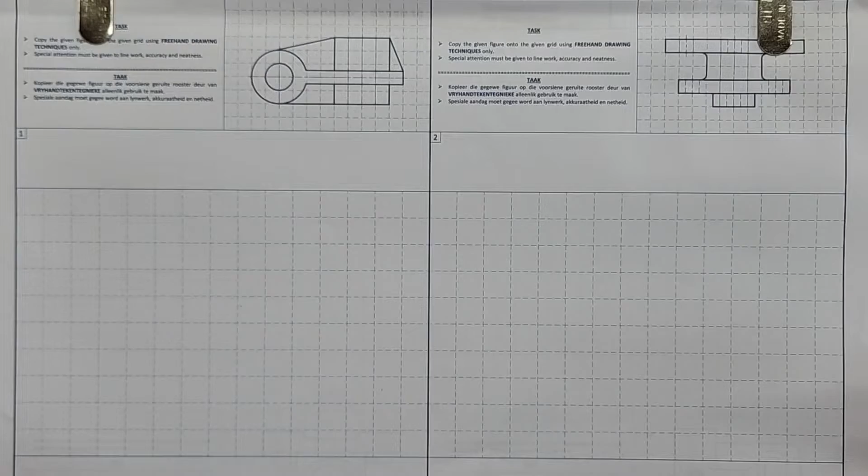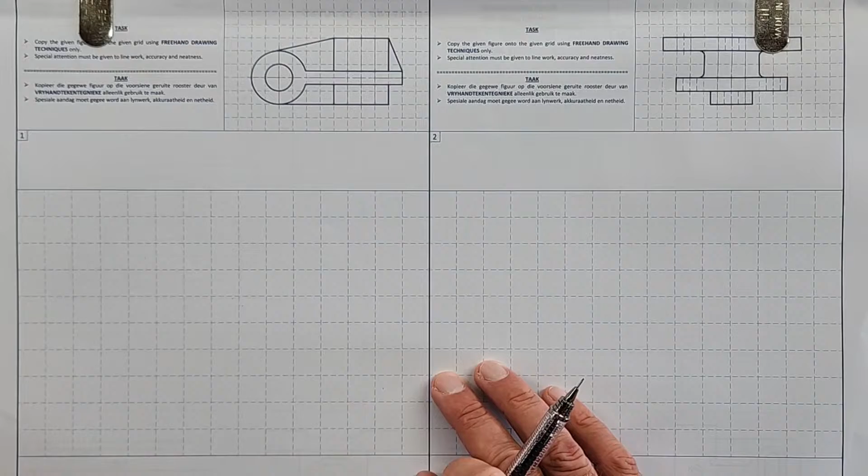Grade 10s, we are in the HSE workbook, and as mentioned before, we are live streaming every lesson that we teach here at Global Leadership Academy for our own grade 10s. And so let's get started here. This, of course, could be very familiar to you, and some of you think, yes, let's do this, and I'm with you. Let's try and get this done right now.

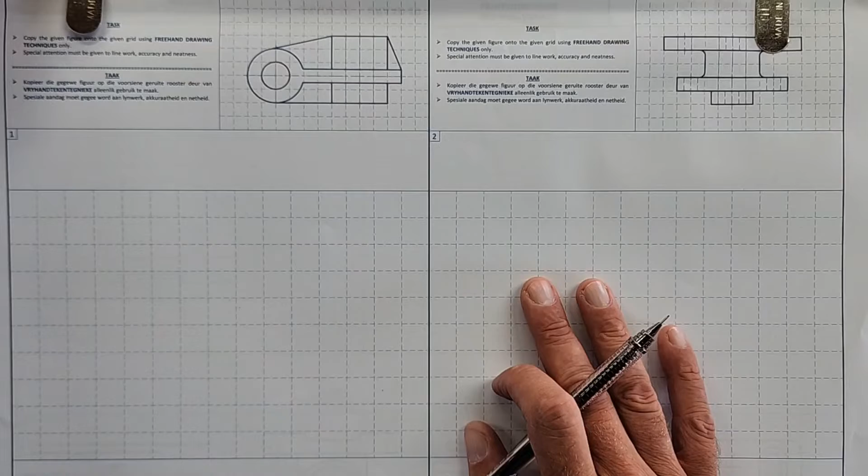So the question that is stated here says, copy the given figure onto the given grid using freehand drawing techniques only. Okay, very importantly, we're not able here to use a ruler or a compass or any other thing to support your drawing. It's only your freehand.

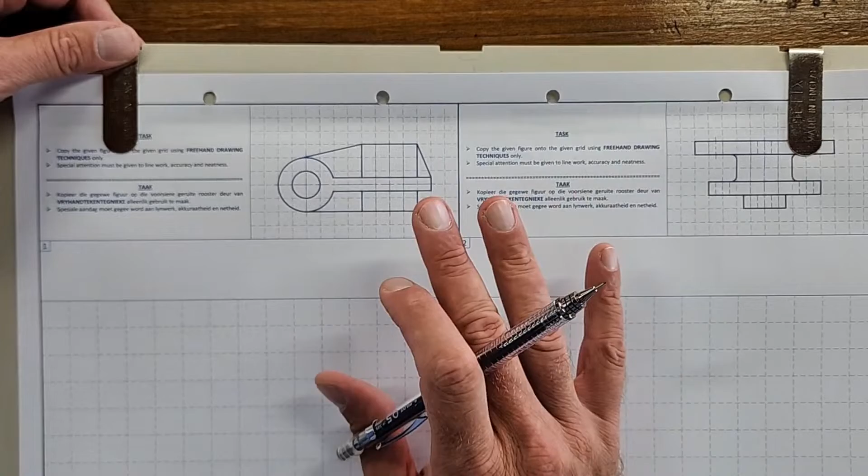I see Mr. Luke is smiling. Why are you smiling?

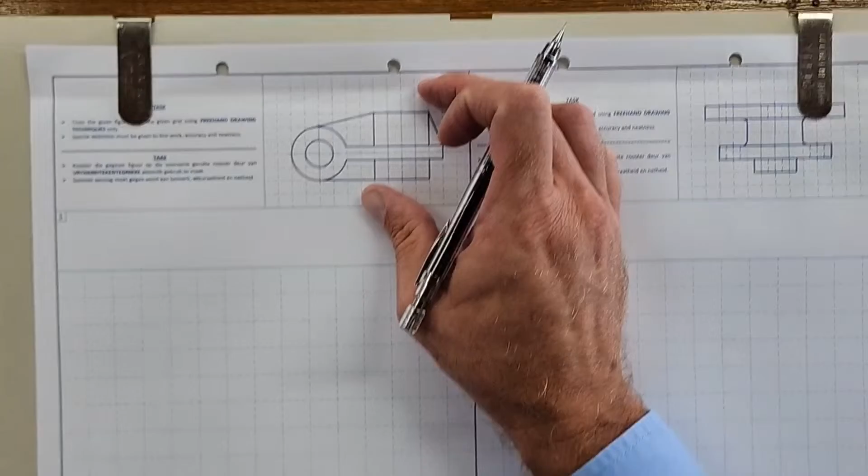Okay, only freehand drawing techniques, right? Special attention must be given to line work, accuracy, and neatness. So when it comes to freehand drawings, please pay attention to the fact that you do an exact copy of what is given. Of course, there's a grid, so your sizing is going to differ. But try and make sure you've got every component here.

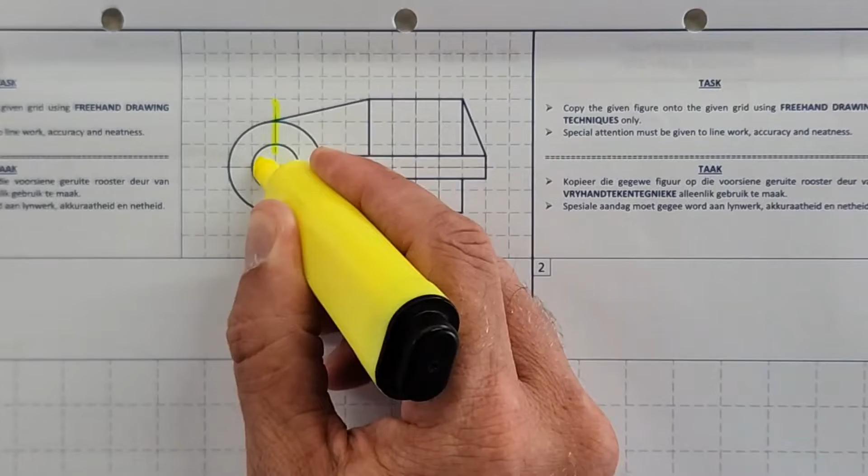There's a couple of components, lines here, that I think some of you've missed. And so let's just zoom in there and look at that quickly. Right here in the center of a circle, we have center lines. Did you see that? All right. And that center line runs all the way through here to the very end. Okay. That's the one part that is a bit faint here, but make sure you pay attention to that.

Then you've got hidden detail, short dash lines going all the way through here. Why do you think that is?

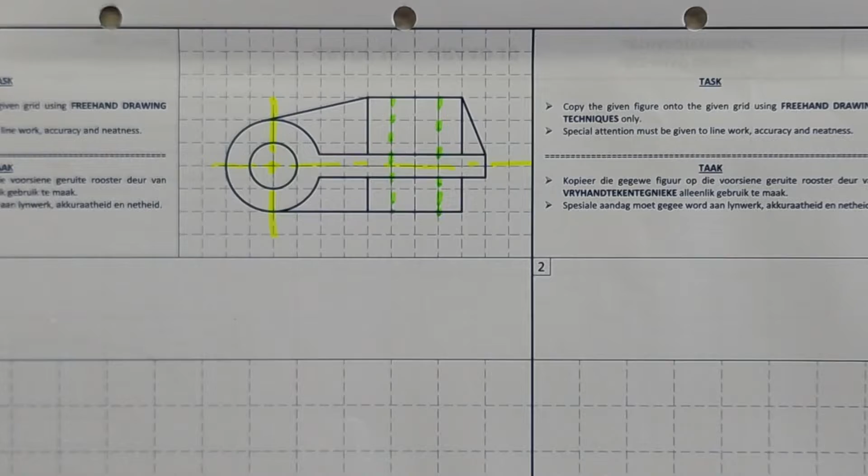There's something else that gives you a clue here. What do we have here? Again, a center line. What do you know about the center line? Whenever there's a center line, there's a circle. So what we have here, if I look from the top, we actually have a hole going all the way through. That's the diameter of that hole. And there's a center line going through. If you haven't paid attention, eyes on the board quickly.

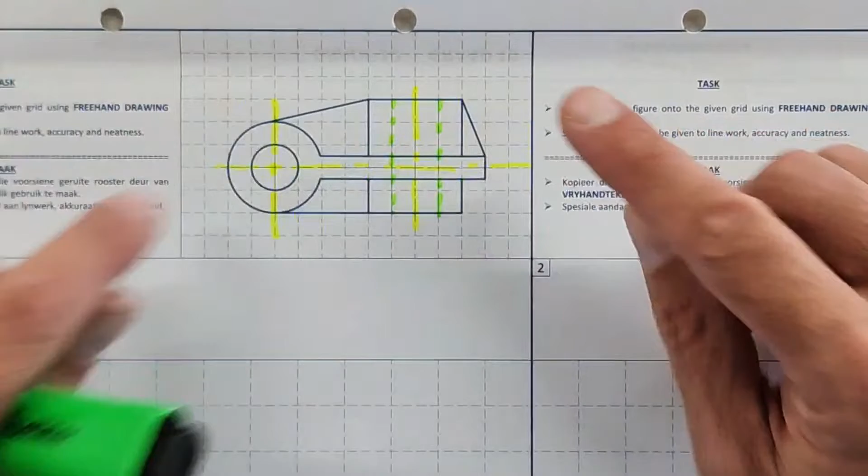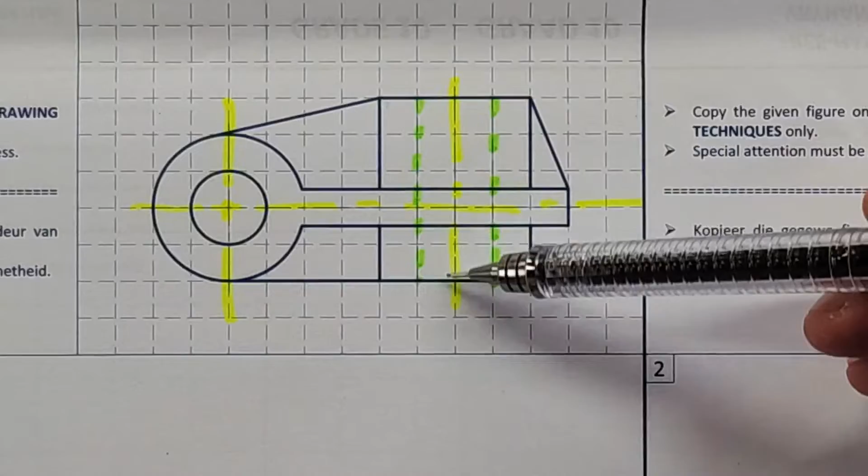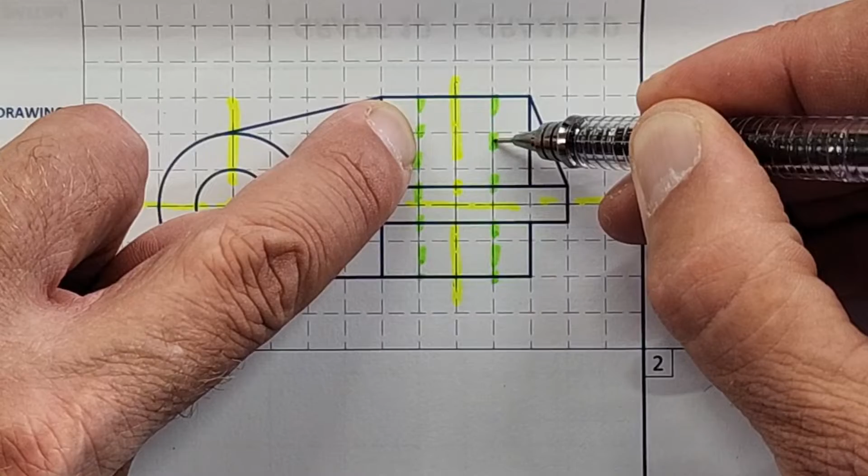And so, we know that whenever there's a center line like this, then there is a circle. The same for a hole going through an object. There's a center line. There is the outer diameter of that hole shown by the dash lines. It's hidden detail. So if I would look from the top, I would literally see a hole similar to this going all the way through this object.

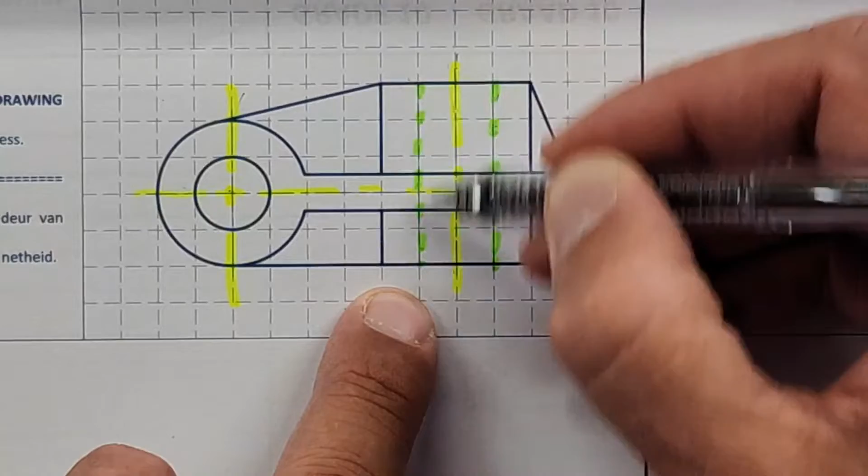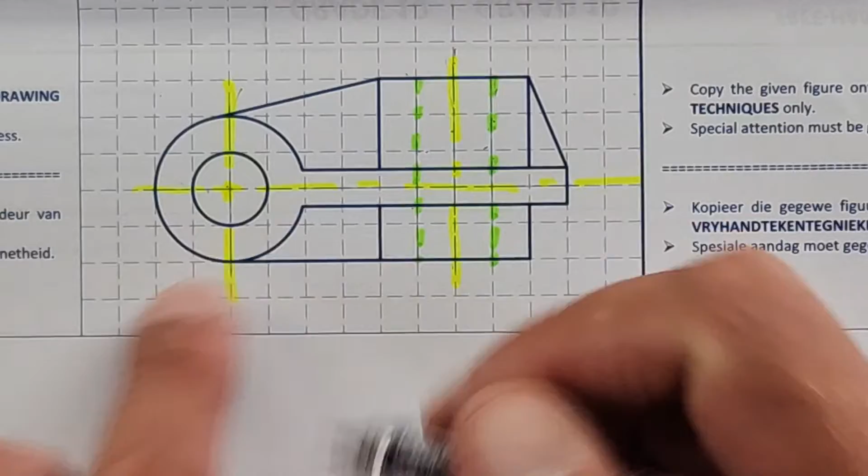Okay, does that make sense to you? Alright, so you don't have to draw another view, you're just drawing this view, but it's important to not miss the dash lines and the center lines in this case. Okay, if we look at the one next to it before we start drawing here, just do a quick discussion of this. Alright, what do we have?

Similar, we have our center line running through here. Okay, there it is again. Now the center line, I'll just do them in yellow so that it's clear. And then look at all the hidden detail here. There's hidden detail. There's hidden detail.

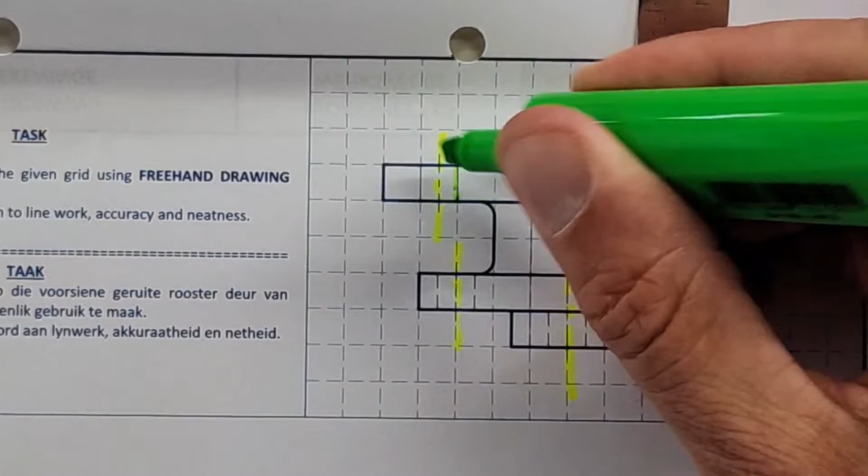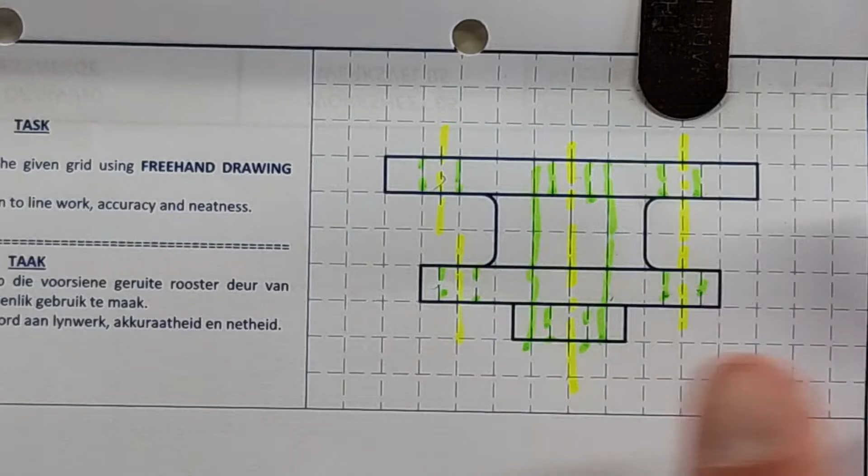Hidden detail. And there's even there hidden detail. Hidden detail. There's another. Alright, so again, if you would have looked from the top, we would have a small hole there. Smaller hole, and there's a bigger hole going all the way through. Same at the bottom. All right. So just identify these line types before you start drawing.

All right. I'm going to draw with you this first few drawings. So let me zoom out and let's get started on this bottom.

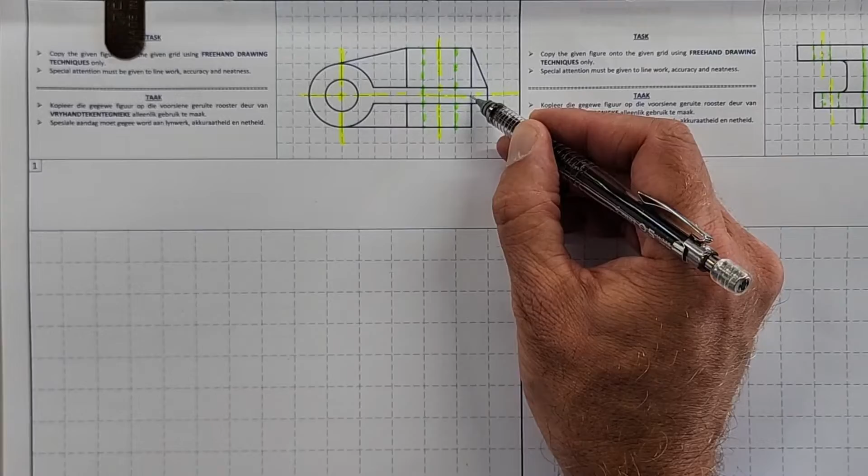All right. Okay. So using this, we're going to do our positioning the same. We need here 1, 2, 3, 4, 5 of these blocks in total. So if I'm going to start again from the side, 1, 2, 3, 1, 2, 3. If I start here, 1, 2, 3, 4, 5. There would be the bottom. Okay. And then this way it's 4. 1, 2, 3, 4. Okay, just kind of getting my centers sorted out.

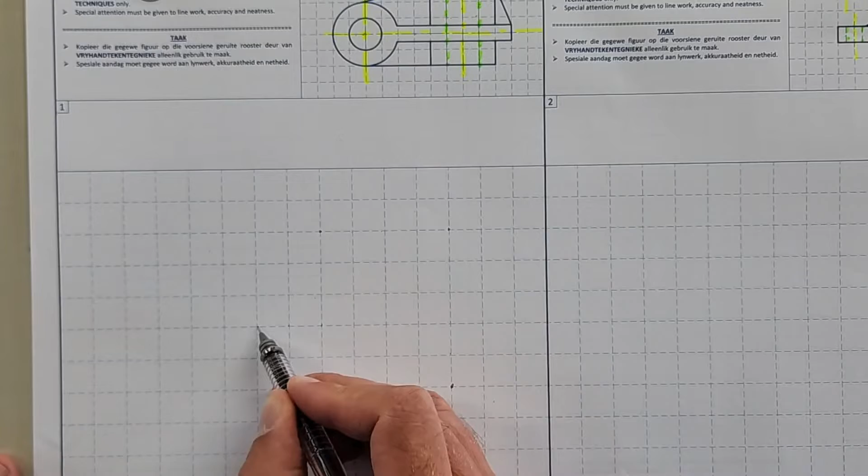1 from this line, 1, 2, 3, 4, and that line is 2 up. 1, 2, 3, 4. So that point there, okay, this point is that center. So I'm going to start off with that center line. Draw that. Yeah. Make sure these spacings are even all the way through.

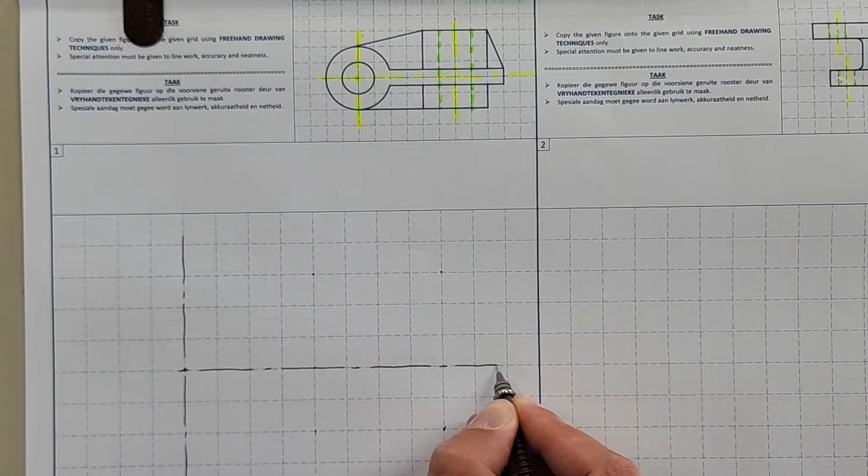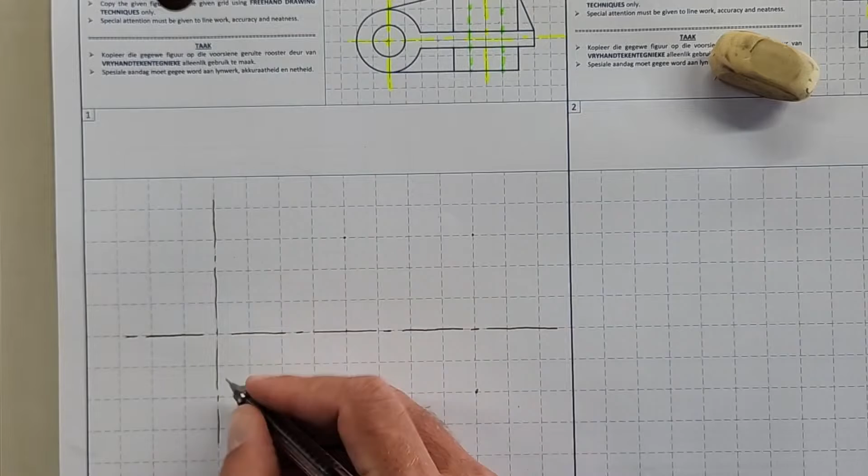Same spacing, please. Another thing that's important in grade 10, luister gou mooi vir my. Always try where these center lines meet that you have two short lines. Okay, it's like a crosshair. When they meet here, we want two short lines. This one is a little bit fat, so I'm going to correct it. But we want two short lines where they cross. Okay, like the center of that, to really indicate that. Space it, please, in that sense.

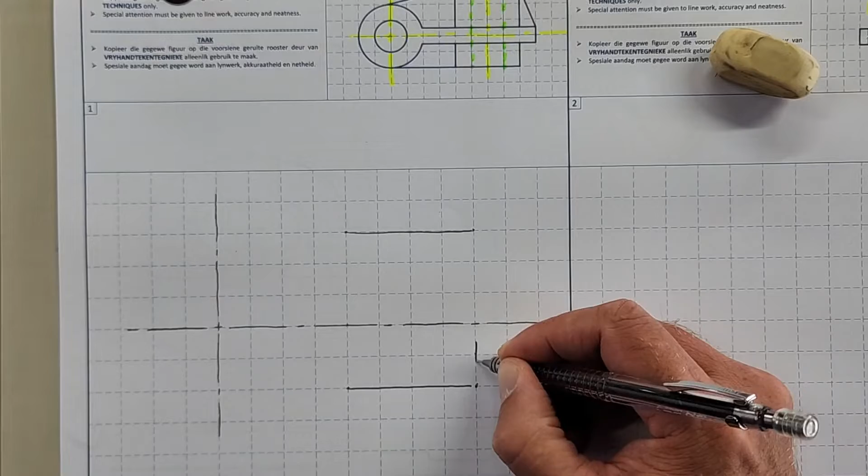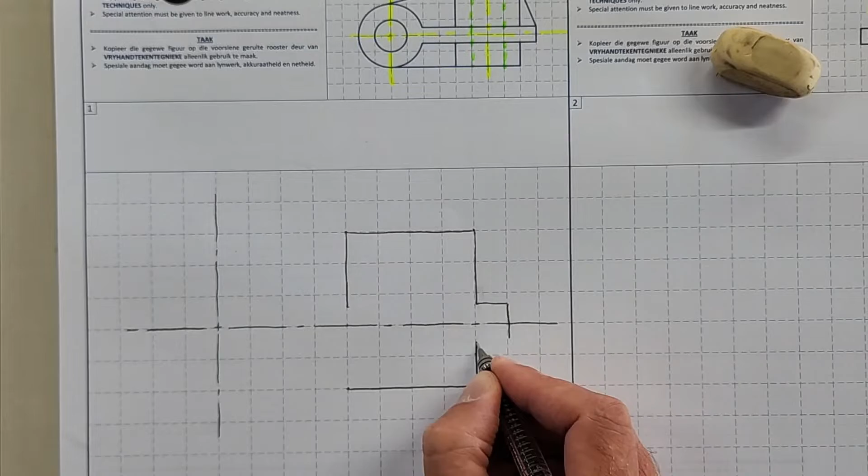Okay, all right. Then we're going to do our straight lines first. This is the straight line going over here. Also at the bottom. Goes up 1.5. That comes down. Maybe you're going to have to twist your pencil a little bit to make sure your line stays nice and sharp all the way through. If you do make a mistake, you can quickly correct that.

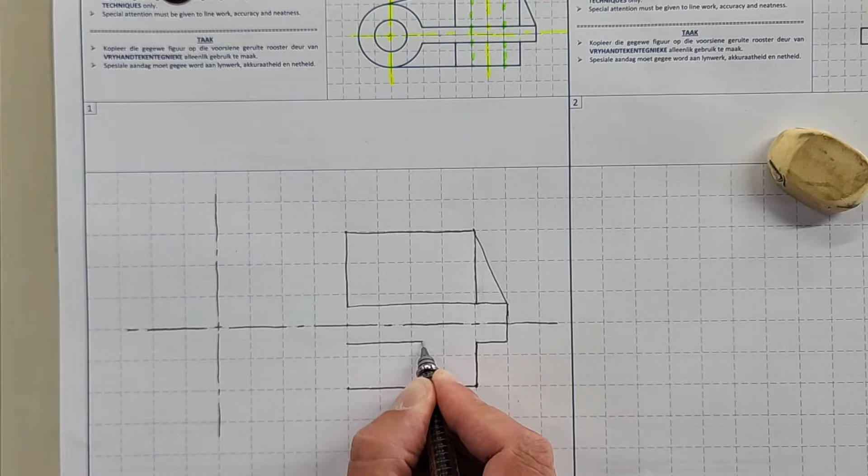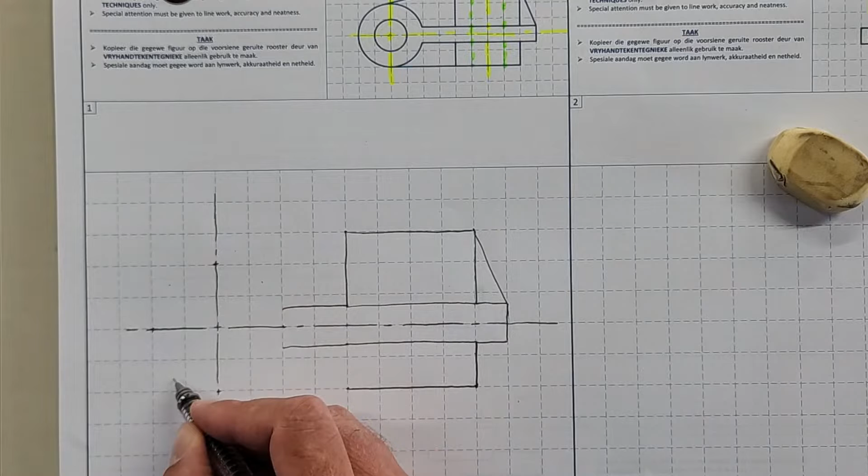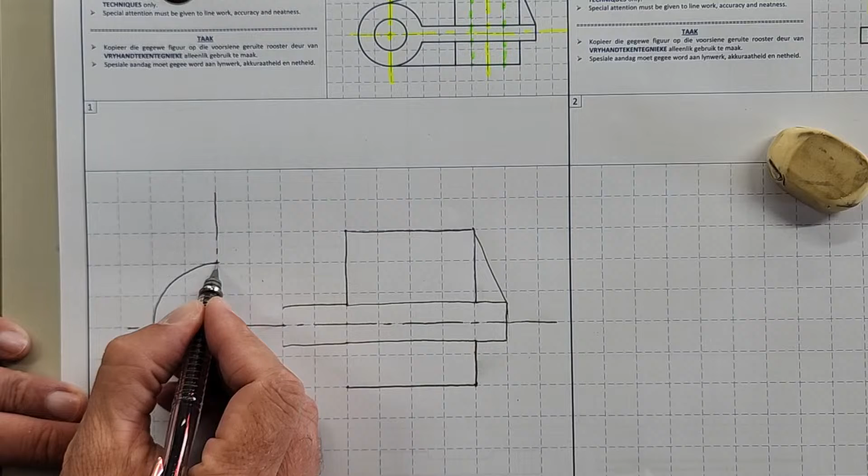Alright, now we get to our circle part, and that goes 1, 2 on either side. So up here, that's a maximum, that's a maximum, there it is. And then I'm going to find at least one more point on that circle to try and help me guide the circle. Okay, let's see. Okay, same for the inner one.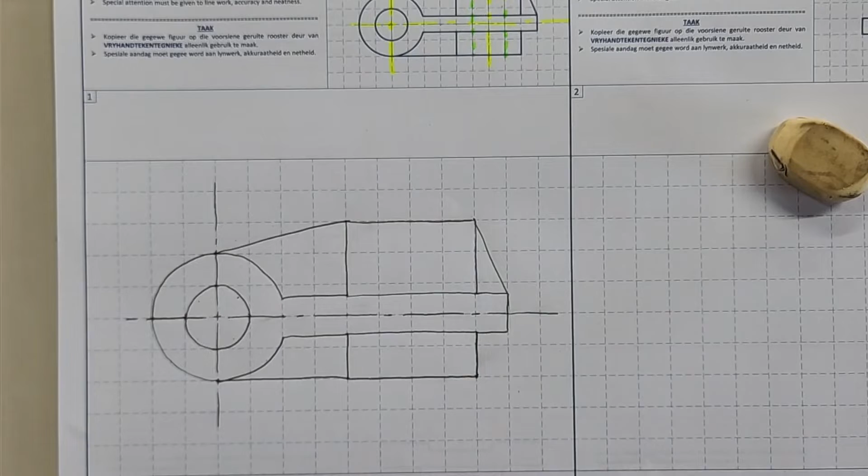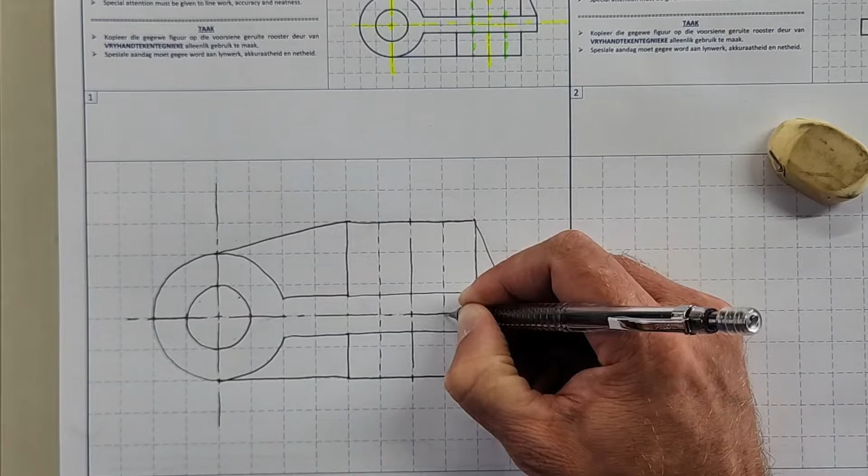Alright, what is still remaining here is this center line here that I've missed. So again, the center. Hidden detail. Okay, when you've drawn that, you just double check the given drawing and what you have drawn to make sure it aligns up, and then you can move on to the next one.

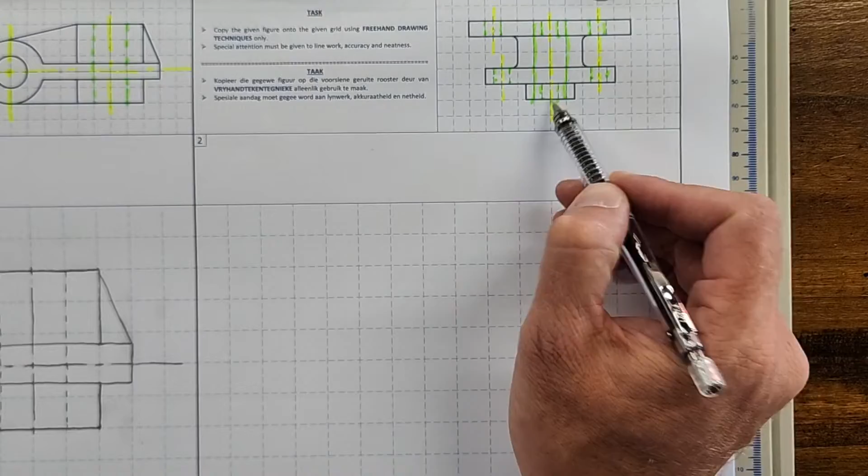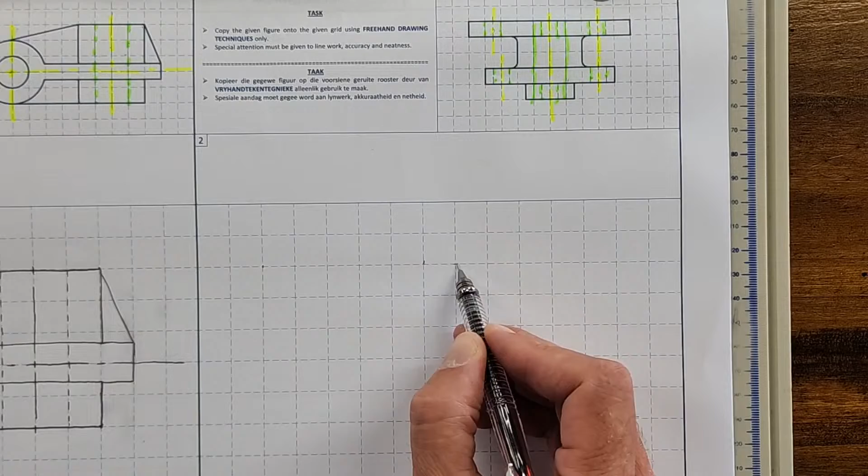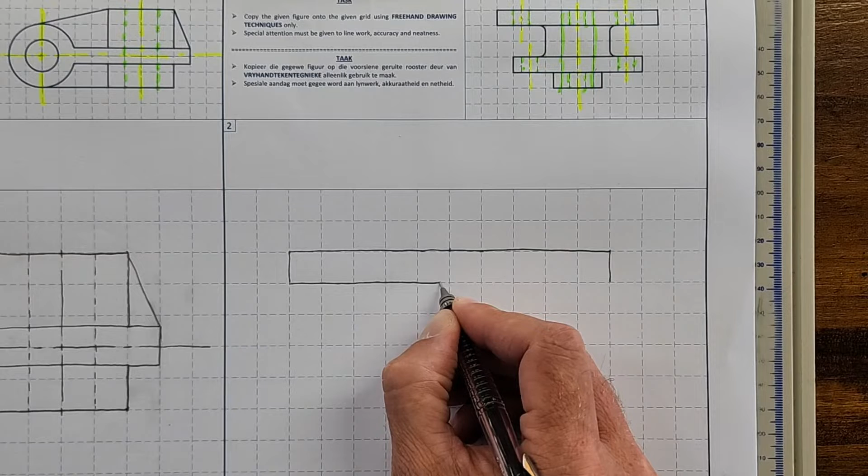So this one, if I look on the top here, again 1, 2, 3, 4, 5, so it's the same in height as this one. 1, 2, 3, 4, 5. The width there, 1, 2, 3, 4, 5, 6, 7, 8, 9, 10. 1, 2, 3, 4, 5. I'll just make a note for my center. 1, 2, 3, 4, 5. Okay. Let's start off with that. 2 lines down, 1 block in, we've got the bottom part.

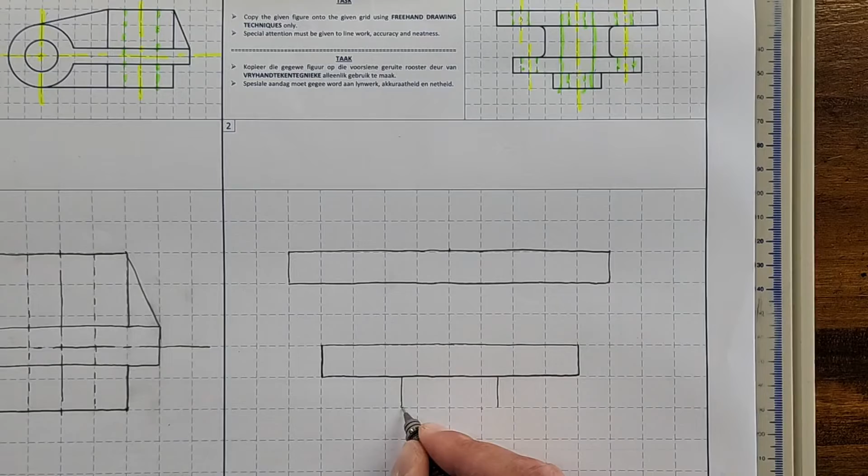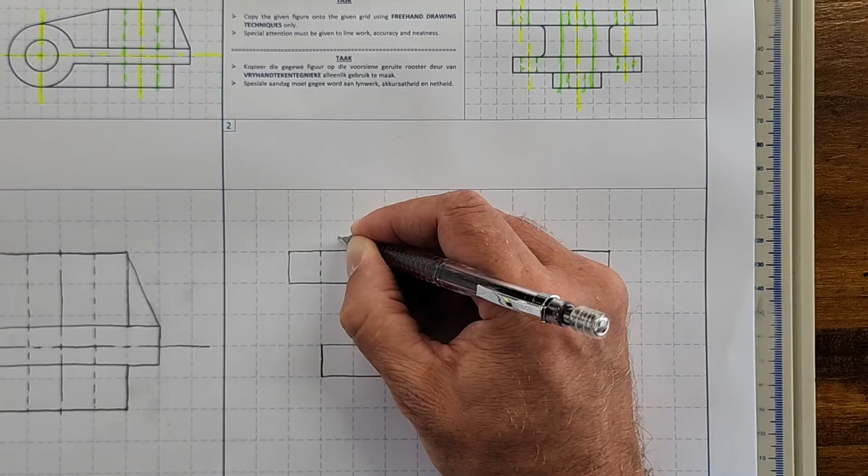Okay, so today is our last lesson on freehand drawings. As said before, tomorrow you're going to be writing your SBA on freehand drawings. So please do some practice today. Make sure you're comfortable with the different drawing techniques when it comes to freehand. Make sure about those line types, center lines, hidden detail, placement of those line types. Okay, so I'm looking for consistency when we're going to mark these drawings, and accuracy and neatness, of course.

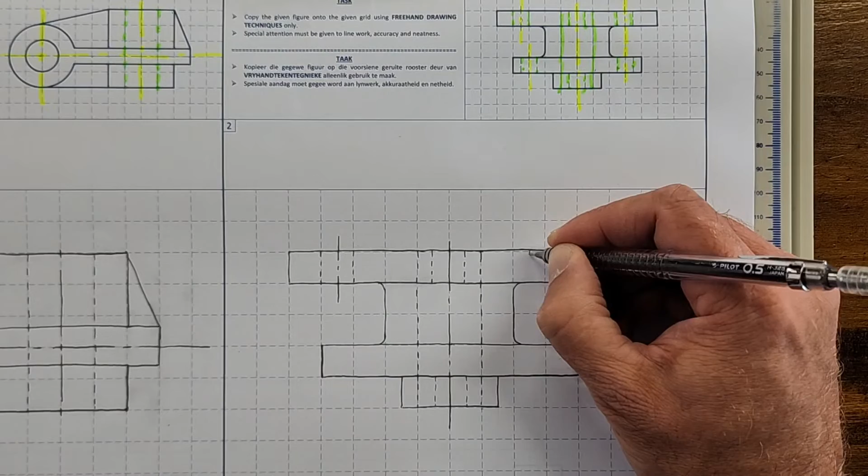Alright, once you've double checked that both of these drawings are as the given questions, you can proceed to page 25 and 26. Right, thank you for watching. Now it's your turn.